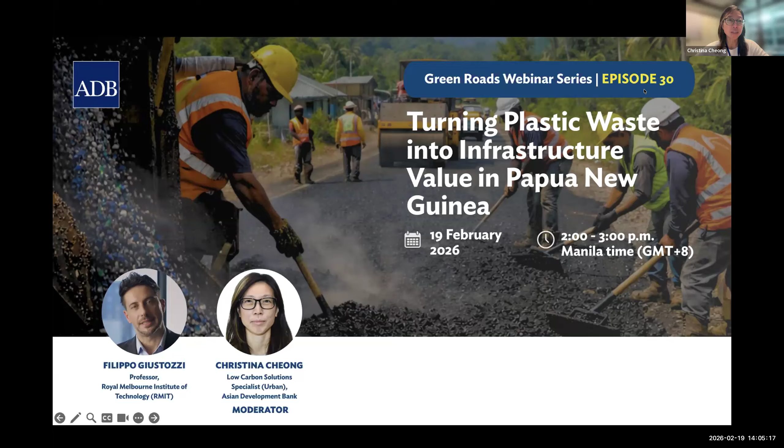Our speaker today is Professor Filippo Giustozzi from RMIT University in Melbourne, Australia. He is a pavement materials and design specialist with over 18 years of consultancy experience in Europe, the Middle East, Southeast Asia, and Australia. His consultancy portfolio covers the design and performance optimization of road pavements, environmental analysis, and development and implementation of polymer modified bitumen systems, recycling technologies for roads and construction waste, and the integration of sustainability into large-scale highway and airport projects. So very extensive experience across roads and pavements technologies.

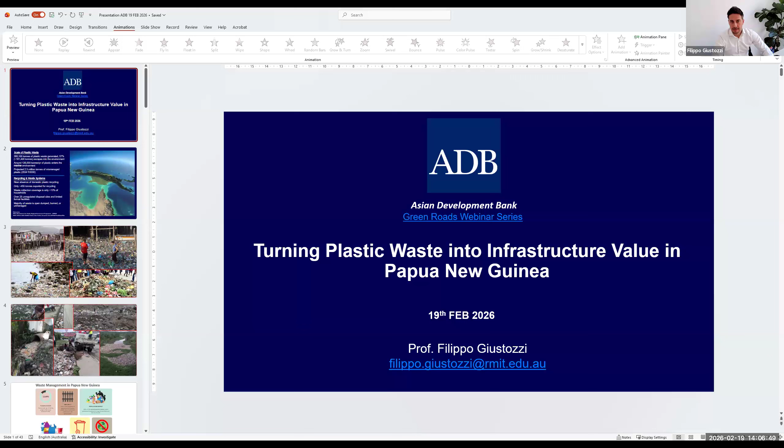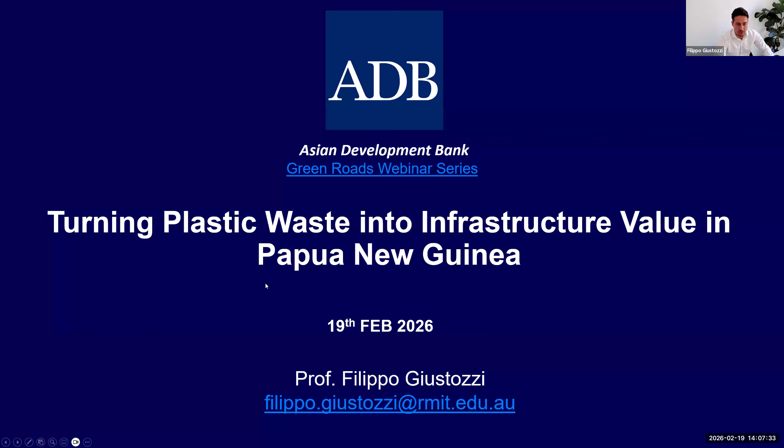Thanks and good afternoon, everyone. I would also like to thank Michael and Ian for this invitation. Today my talk is going to revolve around how to possibly manage one of the most famous waste streams these days, which is plastic, and how to use that meaningfully in converting this waste into a future recyclable value for infrastructure, especially looking at Papua New Guinea, with a little bit of context given by other applications around the planet, including Australia, where I'm from.

Before we start with the real presentation, I just wanted to put some introductory slides here showing you Papua New Guinea. Most of you might be aware of Papua New Guinea and where it's located, very close to the top tip of Australia, as you can see.

As with many countries, especially many developing countries, the plastic issue has become a larger and larger issue year by year. As of the latest statistics I was able to find, which was 2024 data, there are 285,000 tons of plastics generated annually in Papua New Guinea. Most importantly, 57% of it, which is quite a large amount, escapes into the environment. Some of this is reprocessed and sent overseas, but 57% still escapes into the environment. And particularly when it's out in the environment, about 126,000 tons every year are getting into the ocean, which is quite a large number.

There are studies projecting that this will increase significantly because the population of Papua New Guinea is increasing, and the waste is not taken into consideration and recycled properly. It's always dumped or burned or unmanaged. This has generated a projection of up to 2.3 million tons of mismanaged waste plastic by 2035.

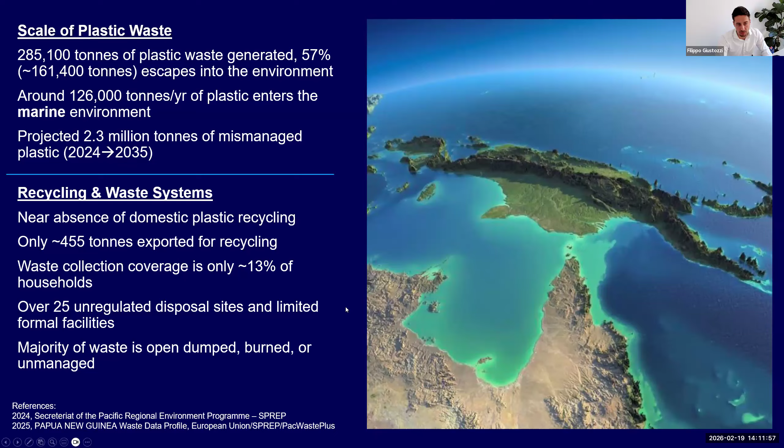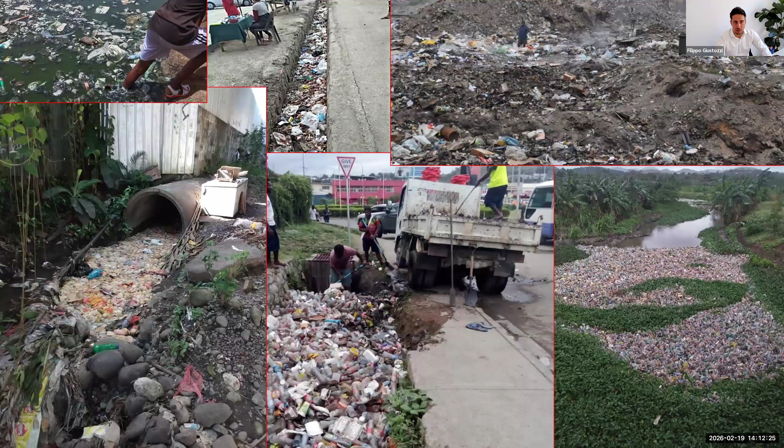This slide, and the one after, is similar, representing what the problem is or was at certain sites in Papua New Guinea. Some of these sites have been remediated now, so they don't look like they did when this photo was taken, but it gives you an idea about the general problem around waste, and also about waste plastic.

It's not just waste that contaminates the land, it's also waste that gets into the infrastructure, into the sewage, into the culverts, curbs and channels. Every time there's a rain event - and in Papua New Guinea you have the wet season, which lasts several months - the importance of the sewage system, curbs and channels becomes very significant. The fact that they're all clogged with waste and plastic is a waste of resources, because men need to go on the ground and unclog the infrastructure, but it's also contamination of the land itself.

So as a summary for waste management in Papua New Guinea: plastic waste accounts for about 13% of the total waste generated in that country. Considering about 10 million people living there, that means about 134 kilos per person per year is generated in terms of waste. There's a projection of population growth of 3.1%, so the waste generated is also going to be higher, projected to surge by one third.

But most importantly, what we've seen is that facilities to recycle are almost non-existent. Recycling, if there is any, is primarily done by private companies at a very small scale today. But the situation is improving, and I'll show that to you in a second. The waste management system also isn't facilitating these recycling efforts, because most of the waste goes to landfill and there's no separation of waste - glass goes together with plastic, together with timber and construction demolition material.

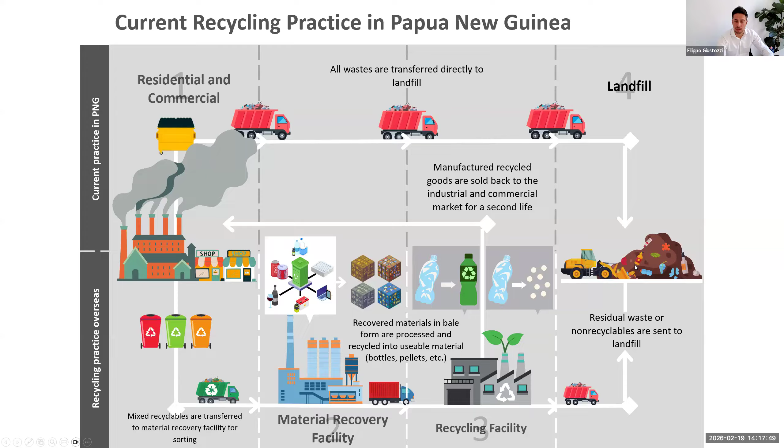So as you can see, there is a linear trajectory moving from the waste down to landfill, meaning the recycling effort is zero. That's more of an indication of a linear economy, and this is what is happening in Papua New Guinea.

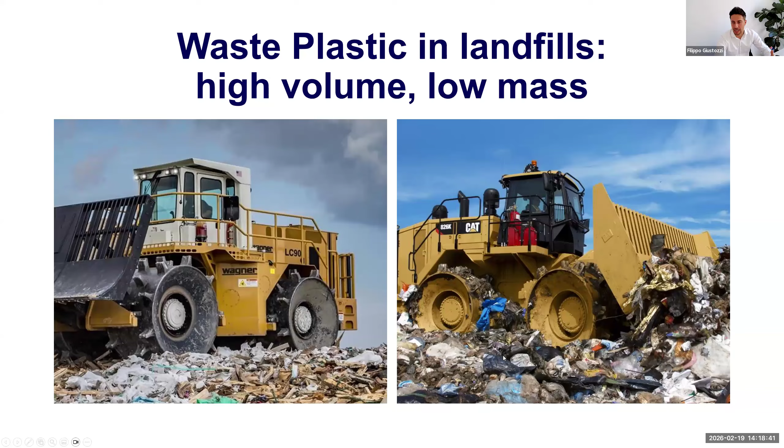And this is problematic in a landfill site because space is valuable and it's not unlimited. Some of the main landfill sites in Papua New Guinea are already full, and they are thinking about expanding them to make sure they have enough to put new waste coming in every day. That's probably one of the reasons why some of the waste is getting burned directly on site in the open air at the landfill.

So the waste management in Papua New Guinea can be improved, but what I would like to convey are these four insights. Number one is that a lot of plastic leaks into the environment. The waste is not captured, and it can be captured for reusing. Infrastructure might be one of the avenues, and it cannot be the only avenue, but it's one of them.

There is significant opportunity to divert plastic into construction materials, as I will show you in the next few slides, instead of putting it into the oceans. The infrastructure sector is emerging as a key end user because of the large volume of material being used when building infrastructure, roads, bridges, curbs and channels, footpaths, airports, aprons and railway.

You will see a few examples later. Number 4 is there is a growing waste of volume, meaning the potential supply of recyclable material is not limited. There is as much as we want if we are able to exploit it.

On the positive side of the story, there is this missing link today between the waste and the infrastructure that can recycle the waste, but also the final transport infrastructure that can use the recycled waste.

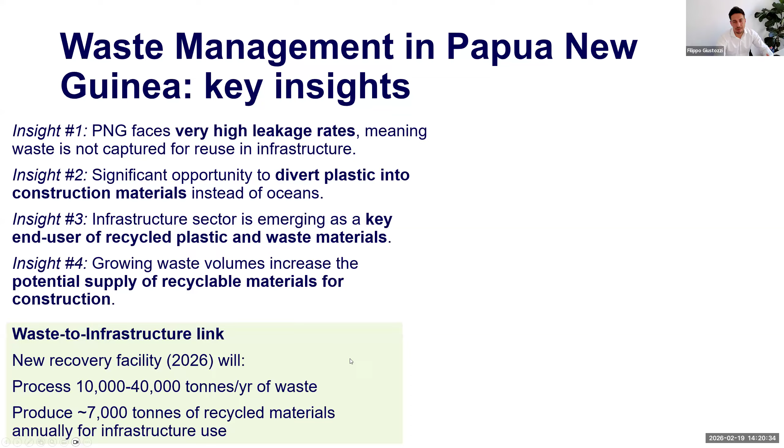Now that's the figures for the waste and waste management systems in Papua New Guinea and Port Moresby. Let's have a look now at the infrastructure, because that, at the end of the day, is where we are thinking about using the recycled plastic. Keep in mind, I'm not calling it waste plastic because we can't use waste plastic in infrastructure. We need to go through a recycling process first, and I will show you what the differences are.

So the road network in Papua New Guinea is not extensive. It's around 10,000 kilometers of primary national road network. In Australia, we have about 800,000, so it's a different scale, but it's expanding.

Probably only 1/3, and this was when this report was published last year, so maybe by now the situation can be a bit worse because roads there are deteriorating faster. 1/3 of the roads are in good condition. Most of the national roads are unpaved, meaning there is no asphalt on top, and only about 2,600 kilometers are sealed type of roads.

Now there is a new big infrastructure development project called the Connect PNG program. This program aims to develop and build 16,000 kilometers of roads over 20 years. In addition, there is an upgrade for 9,000 kilometers of subnational roads. So what is now 10,000 kilometers can easily double or triple over the next 20 years, meaning a lot of volume of construction material needed to deliver this program.

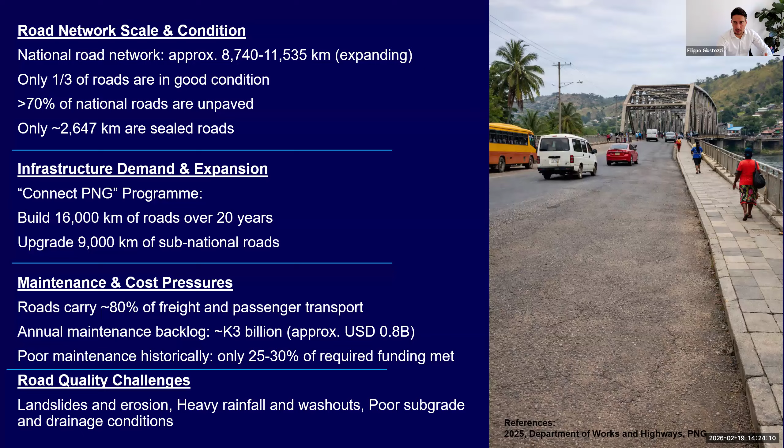Now the road quality challenges in Papua New Guinea specifically revolve around landslides, erosions. There is heavy rainfall there, as I talked about the wet season, washouts. It's not uncommon, and I've been there a few times already, to go there after a rain event and find big puddles all around the main roads, roundabouts being washed away completely within a few months. It's quite an impressive situation of what water can do when there is a slope and the quality of the subgrade as well as the road infrastructure is not the way it should be.

They are also developing a lot of footpath and urban infrastructure in several cities, Port Moresby, Lae, and other cities. There is rapid urbanization. They need to create more footpath, more pedestrian infrastructure, more drainage system, more pavement.

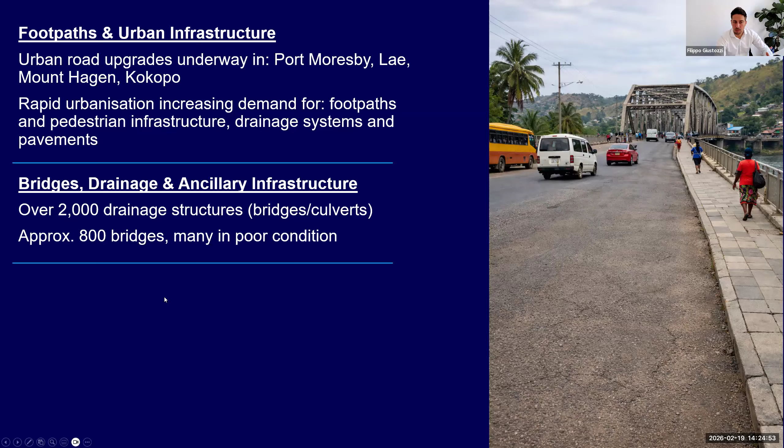All of that can be taken into consideration, because at the end of the day, we can't just put all the recycled plastic into roads. There are just not enough roads to cope with all of that. We can, though, expand into other territories like footpaths, urban infrastructure, road furniture, and I will show you a few things later, as well as bridges, obviously, with many of them being in poor condition.

Now, to close and give you a summary of the transport infrastructure, we looked at the waste before. This is a summary for the transport infrastructure. I summarized here three insights.

One is that infrastructure expansion obviously creates a lot of demand. There is a need for construction materials, and volumes are quite big. Kilometers and kilometers of roads require cubic meters and cubic meters of aggregates, of bitumen, of soil. So the role of infrastructure is quite massive in the development of a country, but it also requires significant resources. So there is an opportunity there to use recycled materials and absorb part of the recycled material.

Number two is that PNG cannot just keep building new roads and doing maintenance on roads every six months, every wet season, every year after the wet season. They need to build something that is longer lasting and reduces maintenance at the same time, because this will save budget over the life cycle of the infrastructure, obviously.

Number three is that it's not just roads, as I said, with plastic modified asphalt, but you can develop other things out of recycled plastics: geosynthetic for slope stabilization and erosion control, plastic pavers, plastic tiles for footpaths. You can develop drainage components like pipes, street furniture, benches, noise barriers, lighting poles, and so on and so forth. I will show you a few of these later.

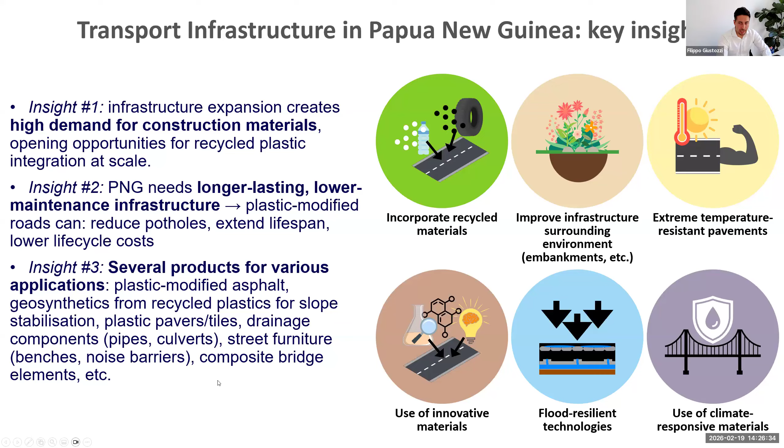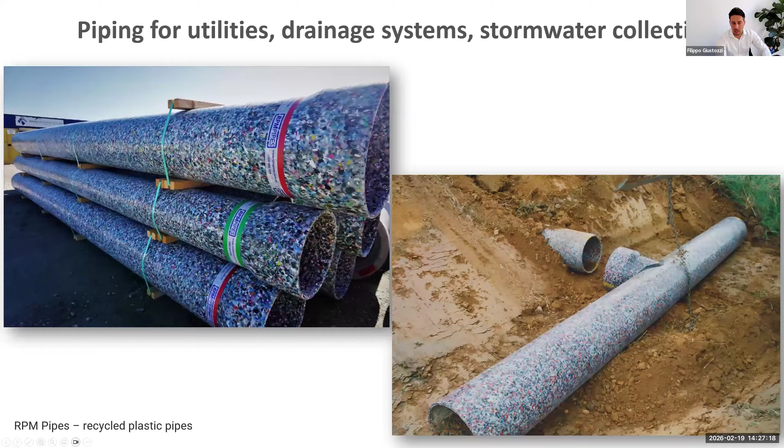So this is a summary of many applications and product development that have involved recycled plastic over the past, I would say, five years across Australia. This is an example of piping for utilities, drainage systems, stormwater collection. You can use it for sewage and roads, and also for agricultural purposes. I put here the name of the company producing it, so if you want more information, you're welcome to go to the website. It's all made out of recycled plastic, as you can see from the multicolored aspect of the piping.

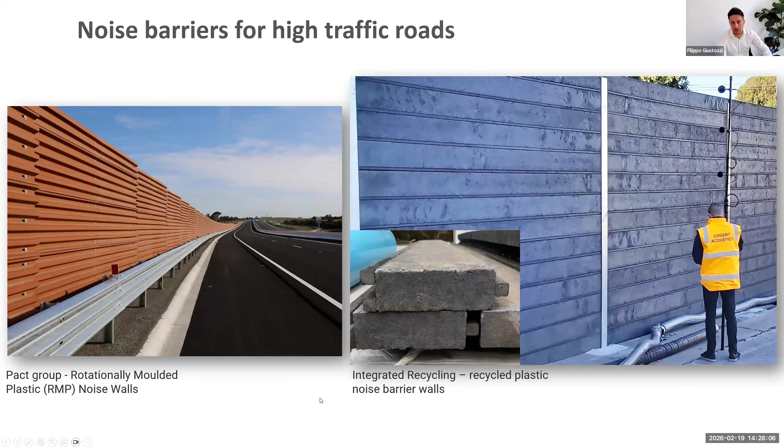Noise barriers for high traffic roads. Two types of noise barriers here were developed and tested. There are probably more around the world by now, but it's something that can be done, and it has already been applied in the field. This is how it looks - the slat made out of the horizontal slats that you see here, a zoom in of that, made entirely out of recycled plastic. The man there is measuring the absorption or reflectance of the noise signal, given a source of noise on the other side of the wall. So this has been installed and it's ready - shelf ready. You can go and buy it if you need it.

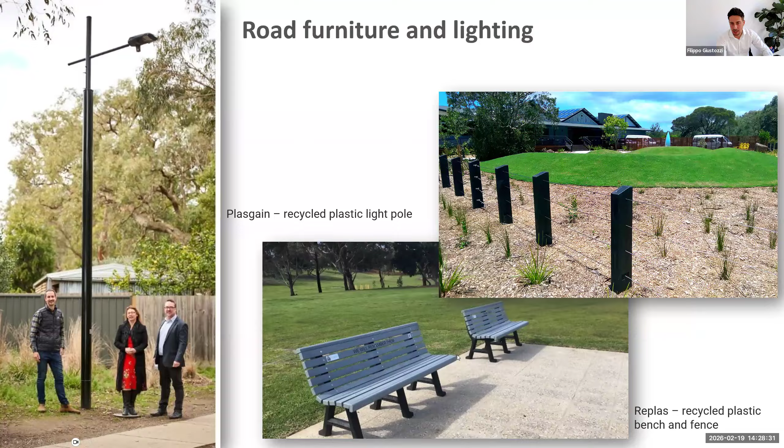Road furniture and lighting - this light pole is all made with recycled plastic, the side pole that can produce lights on the street. Plasgain produced it. We have plastic benches - pretty much every supermarket in Australia has got these plastic benches. Fences for housing are also all made with recycled plastic.

Recently, one of the main train stations in Melbourne installed recycled plastic railway sleepers. You can see the concrete sleeper on the left-hand side of the top picture, and then all the plastic sleepers being placed by the man at work on the site. And also recycled plastic blocks if you need to build something lightweight - that was a good option at the time.

So it's not just plastic, recycled plastic in roads, but you can engineer waste plastic into a way that makes sense once the product is recycled. That can generate more avenues for companies, increase the business, but also foster a more sustainable infrastructure in a way.

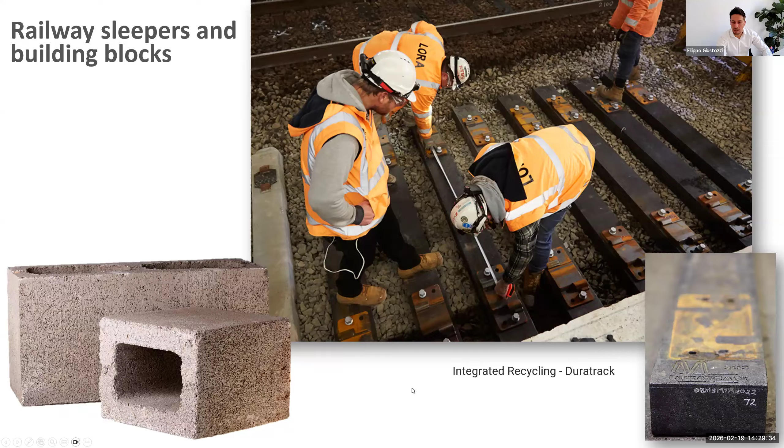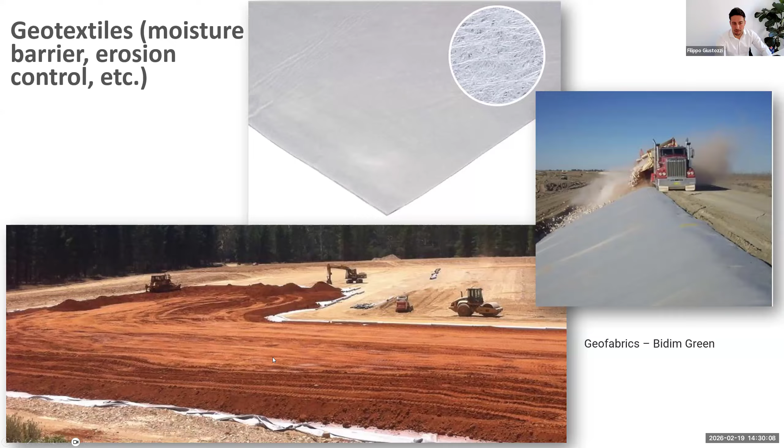Oh, geotextile, I was forgetting about this - moisture barrier, erosion control, especially in a country where there is a lot of rain and a lot of water coming up from the bottom all the way to the surface where the road is, having a geotextile that acts as a moisture barrier. This is all made out of recycled plastic. It's called Bidim Green, but there are several companies selling similar things for erosion control on slopes and embankments, all the way to substrates for roads, avoiding capillary rise of water.

All of this just to show you two different pictures. On one hand, we've got the massive material demand from the Connect PNG program, the expanding cities, and the increasing population that requires more infrastructure. And at the same time, we've got a lot of waste that goes into the ocean, that is not recyclable, that is not recycled - we don't know what to do with it. Most of the time it's just mishandled, put into landfills, and burned eventually. So if we could connect the two things together, that would be a very good example of something useful for the country.

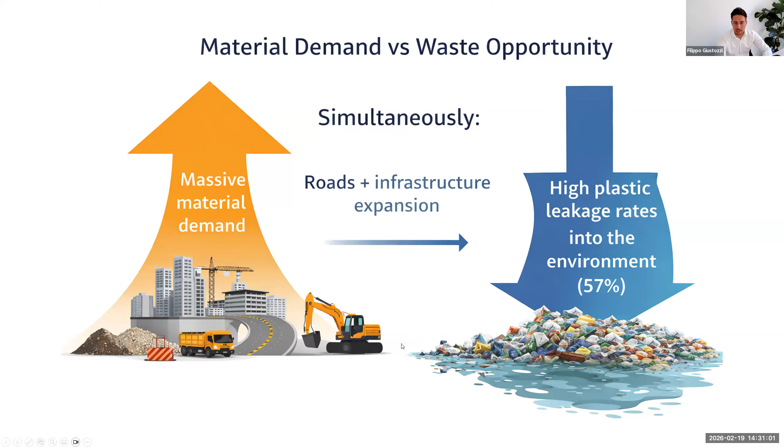This isn't just a problem for Papua New Guinea, but a very common issue across Pacific Island nations and developing countries generally. I want to be clear, though, that PNG is actually a very nice country.

So coming to the road environment, how does plastic in asphalt really work? I get a lot of questions about whether the road will look multicolored, similar to the pipes you've seen.

The answer is no. We can't just use any type of plastic, the same way you can't use any plastic to build a bench or a geotextile, because plastic properties vary so much - from very rigid plastic that melts at 260 degrees to very soft plastic that melts at 110 degrees.

Some, not all, of these plastics are suitable for modifying asphalt - the black material you see on the road. When you add this particular type of plastic into the road mix, made of stones, aggregate, and bitumen, the mixing is done at high temperature, around 160, 170, 180 degrees Celsius.

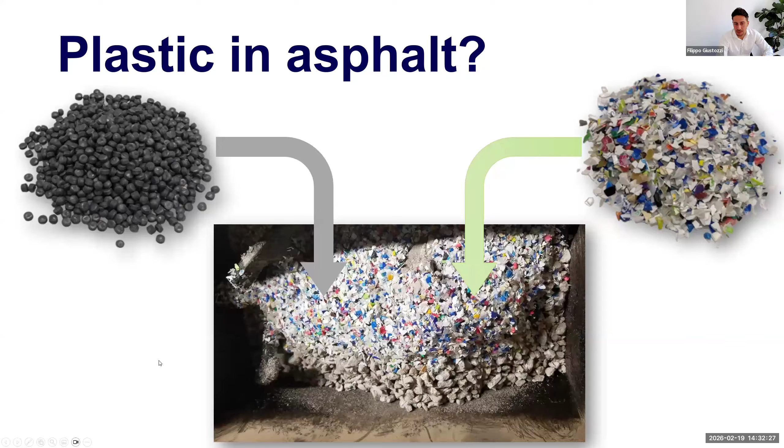So if you use plastic like the ones we've used in Australia, which melts at around 110 to 150 degrees, it will all be gone by the end of the process. I'll show you an example of this from our laboratory.

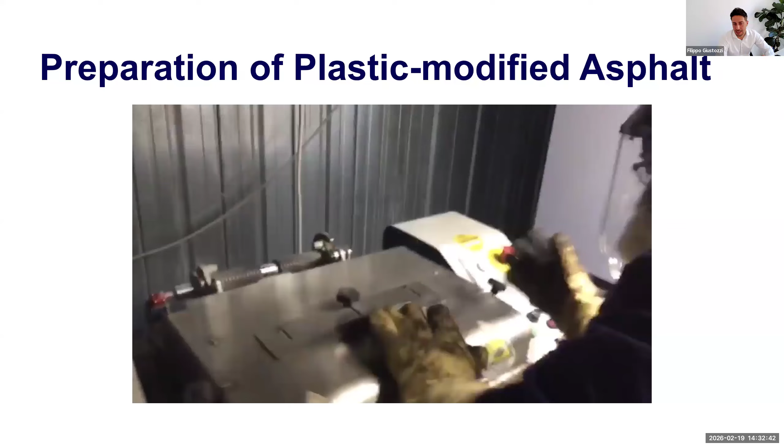This is the multicolored plastic together with the aggregates, all done at high temperature. After mixing, there's nothing left of the colors - it's all incorporated together into the same mix.

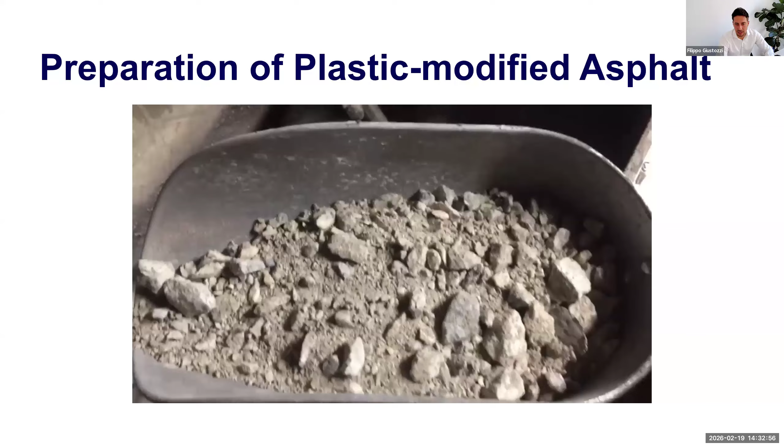This already answers a lot of questions around microplastics generation. The plastic doesn't exist anymore in its previous form - it becomes part of the mix itself. And the quantity is very minimal, about 0.5%, 0.6%, 0.7% of the total material.

But because infrastructure requires so much material, even 0.5% amounts to 7.58 tons of plastic per kilometer of road. I'll show you some statistics later.

I was only able to show you the laboratory mixing process, because you can't put a camera into a large asphalt plant and film it, or stop the plant mid-process to take video - it would be unsafe. So we've done this demonstration in the lab instead.

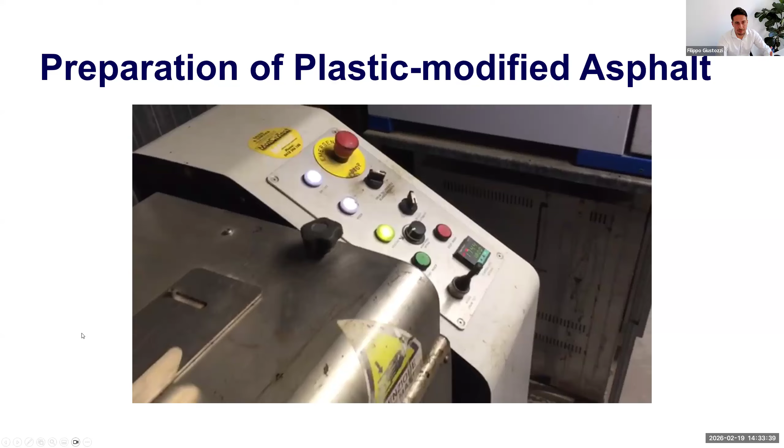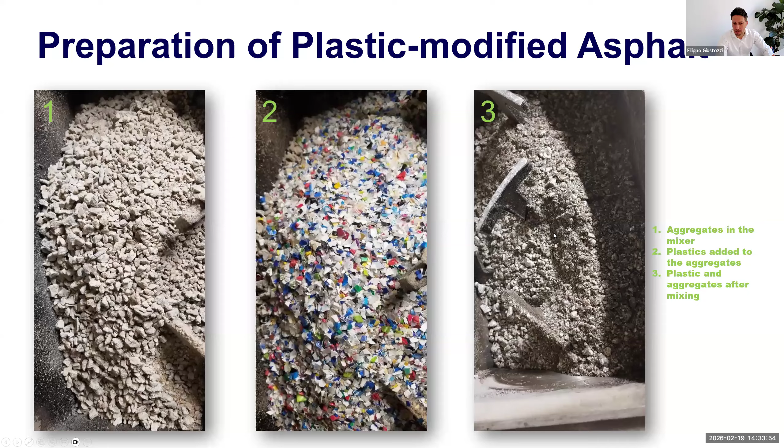A few photos: step one is the aggregates being loaded hot into the mixer. Step two is addition of the plastic. Step three is the end of the process when everything has been mixed together, so each aggregate is coated with recycled plastic that's no longer multicolor. It's melted, creating a sticky effect around the aggregates before bitumen is added, converting everything into that black asphalt substance.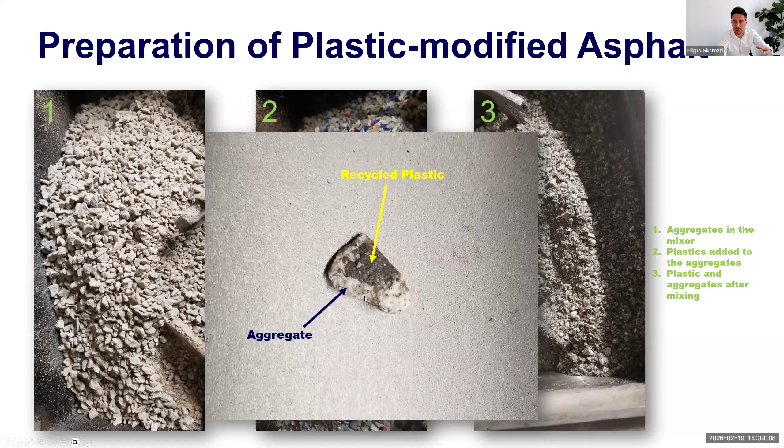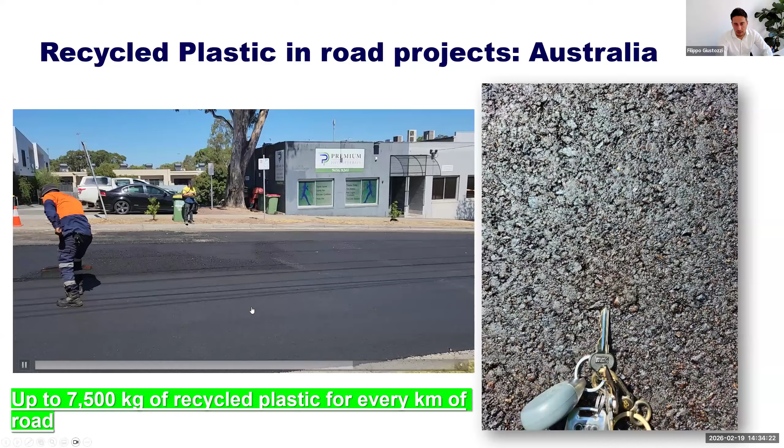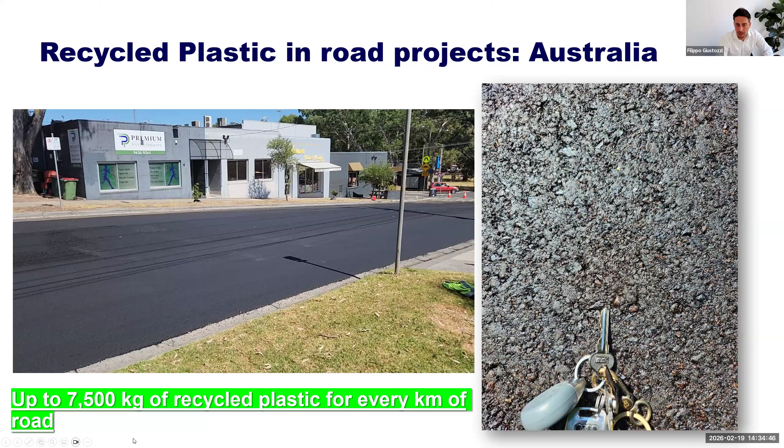This is an example of an asphalt road paved with recycled plastic in Australia. Many recycled plastic roads have been laid in the past - I think the first was probably in 2018, so about 8 years ago now. As you can see, it looks black as usual, nothing changes. You can use up to 7.5 tons, or 7,500 kilos, of recycled plastic per kilometer of road, though it's usually around 4,000 to 5,000 kilograms per kilometer.

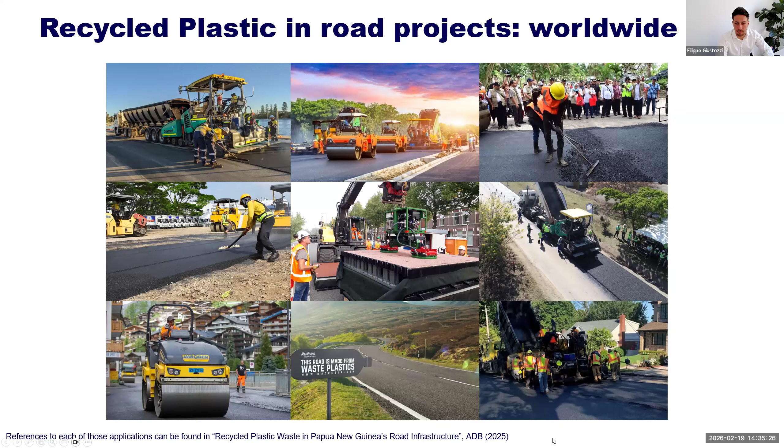Other examples show this isn't just done in Australia - these are from all over the world, including Canada, the United States, England, and different parts of Europe. If you want the full, comprehensive list of each location where these photos were taken, check the reference at the bottom, which I've also included at the end of the presentation.

Now, I didn't think of this as a technical presentation, so when preparing the slides I avoided difficult-to-grasp graphs, equations, and lab or field results. But it's well known now, especially since the use of recycled plastic in roads isn't something that happened yesterday.

We've been discussing this for quite a while, and we've been using it on quite a number of roads that have been monitored over the years. Plastic in asphalt, if done correctly, and by correctly I mean using selected recycled plastic, and I underline selected because you can't use everything you want, improves resistance to high temperature.

Think about this in a PNG environment, in a PNG context where the temperature is actually quite high. There's an enhancement in terms of resistance to cracking, and cracking is the beginning of what a pothole can become later on down the road. It increases asphalt stiffness, reduces fuming and emission at high temperature, does not cause additional harm in terms of microplastic problems, and does not affect the future recyclability of the road materials.

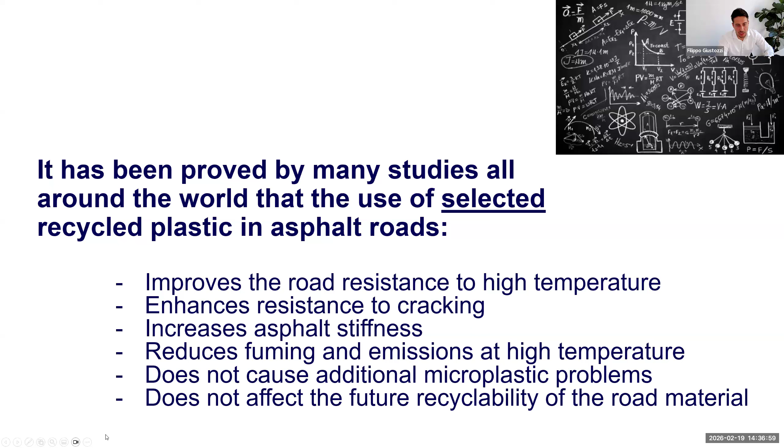If you're unsure about or want more information about any of these bullet points, just drop me a line or do your research online. There's a lot of material that has already been put out there since quite a while now.

In Australia, for instance, I was one of the people who developed specifications for the use of recycled plastic in asphalt. This was done between 2020 and 2022, 2023. These are national specifications, and you can see the suitability of recycled plastic as road construction materials. If you want to download it, you can do so for free through the Austroads website.

Austroads is the assembly of all the departments of transport in Australia and New Zealand. The release of microplastic from plastic-modified bitumen mixes, the asphalt abrasion test, that's something we developed, a world first, to find out if there was indeed a need to look at microplastic coming from recycled plastic-modified asphalt. There are also guidelines in the state of Victoria for using recycled plastic in asphalt mix.

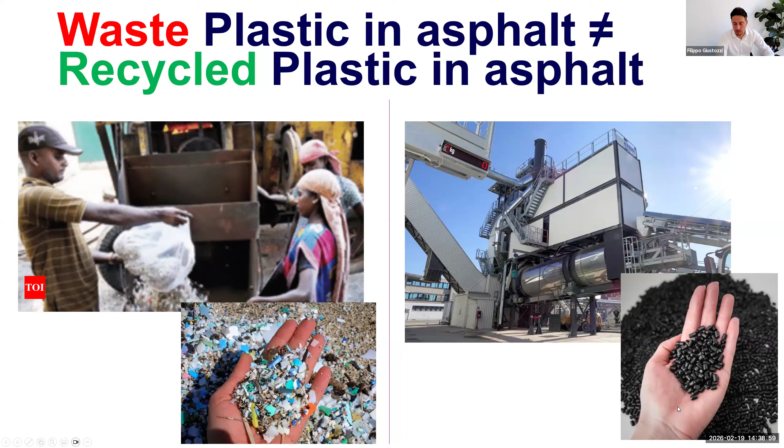To get to that point of the small little black pellets, you need to go through a recycling phase. The recycling phase starts from the collection of plastic in different bins, different colors. The plastic is then sorted. Don't get me wrong, in some countries plastic sorting is done manually by several people who do that all day, separating different types of plastics. And the recycling is still effective.

Obviously, it might not achieve the same hourly production rate as a more developed country using infrared sorting or other artificial intelligence technologies associated with infrared and other things, but it might still be a starting point. After sorting, the plastic is washed, then shredded or ground, then melted at high temperature, extruded into small filaments, and then put into cold water for quenching and pelletization.

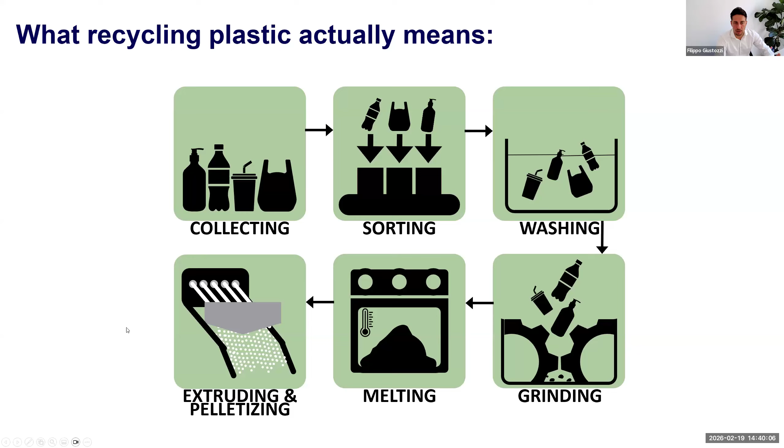I'll show you how it looks. From the original plastic waste that is baled at the material recovery facility, it gets into the plastic recycling center where it's separated. So you get all the bottles going to one side, and the plastic lid of the bottles going to a different side, because the lid is sometimes polypropylene while the plastic bottle is polyethylene terephthalate, PET. So it's all separated.

Then it becomes a matter of shredding it into small particles. After shredding, it gets washed. Sometimes the washing is done before shredding, but as long as we wash it, it's fine. Then there's an extrusion process, it gets into cold water, and gets cut into these small little pellets, and that's the final product.

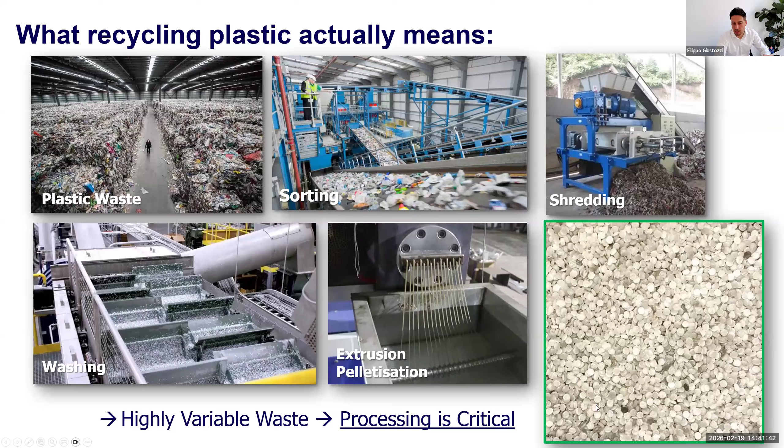This is a recycled product, so there might be contamination because the sorting, the shredding, the cleaning cannot be 100% accurate. But it can be produced with certain tolerances or tolerance values that are suitable for road construction.

Going to the road project in Port Moresby and how we use that to implement some climate mitigation strategies. That's related to the fact that the temperature in Port Moresby is rising, and it's rising differently coast versus inner part. But overall, they've got pretty much the same issues as all the Pacific Island countries.

Segregation, we went through these 4 different stages in Port Moresby: segregation, processing, supply to industry, and construction. And keep in mind that there is nothing there, so we had to develop everything from scratch, just from literally meetings, phone calls, visits to the plants, and trying to find out what they have, how much they have of this, what the capabilities are, who the main player could be, and put the group together into something that is finally making sense.

So as you can see, for the segregation, as I said before, if you don't have automatic machines doing it for you, you need to do it by hand. This is an example of what is happening and what it has been happening for the past few weeks in the Baruni landfill in Port Moresby.

This is directly from the landfill where the plastic is sorted and divided into different types. We gave them a flyer, some explanation of what we wanted and what we didn't want, and they started separating it into different streams. Waiting at the end of the day, taking notes with little notebooks about how much of each type of plastic was collected. You see they separated the high density polyethylene from the polypropylene, and they didn't find much polypropylene on that day because it was only 6.54 kilos. As you can see, the date is the 20th of October 2025.

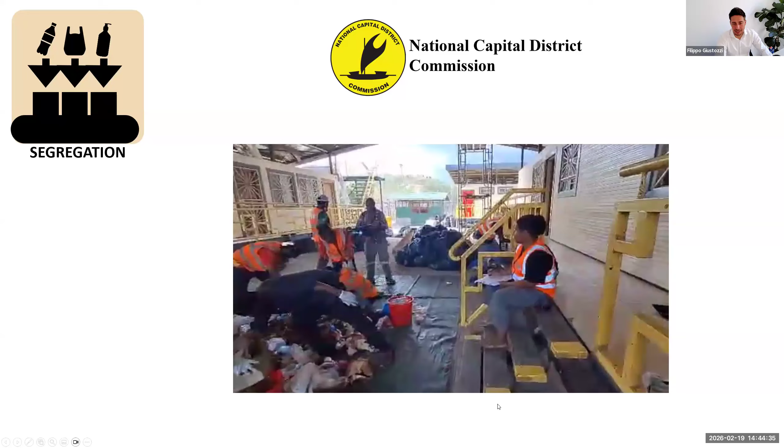It's basically separating recycled waste plastic by hand, just making sure that only what we require for road purposes is collected. You can see that they've done quite a lot, and it's all separated into different stockpiles.

Okay, the second step is the processing. And for processing, there was nothing in Papua New Guinea, so we had to liaise with a company called Total Waste Management Group in Papua New Guinea. They had bought this machine.

It's one of the first of its kind in Papua New Guinea, and this is basically a shredder. It can take big chunks of plastic and shred it into this minuscule kind of granulate pellet type of form that we can then use further down the track to build roads.

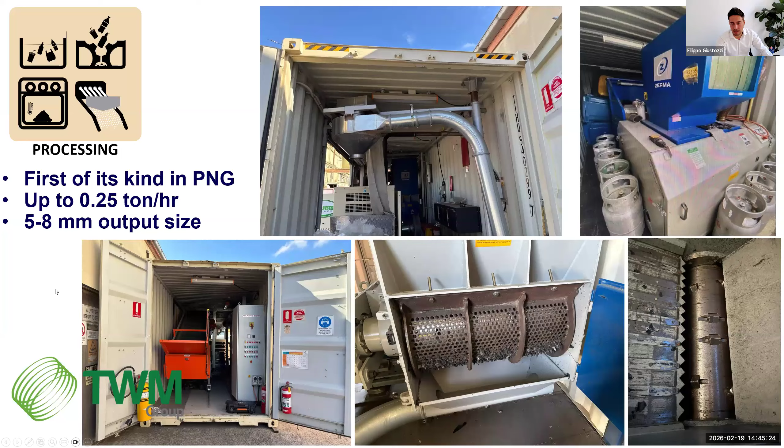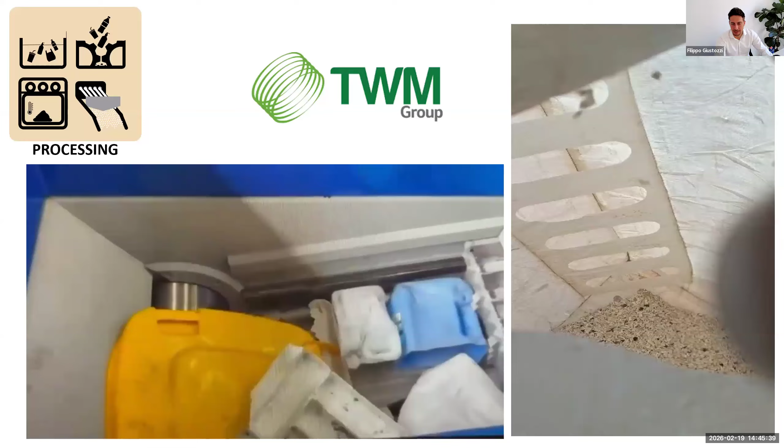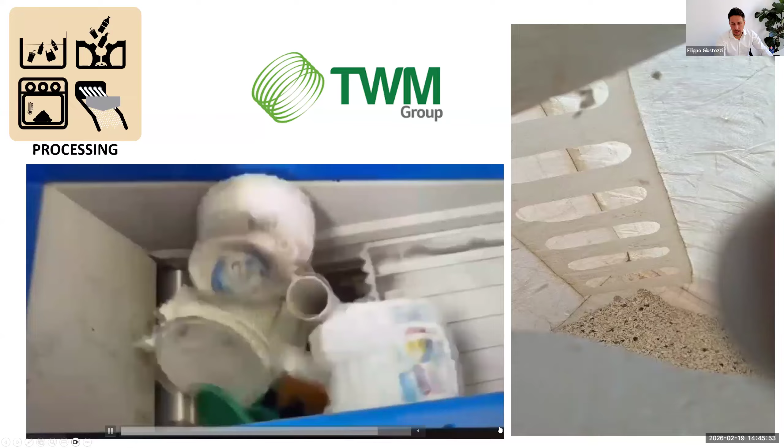So this is how the machine actually works. They usually put in their different types of plastic, that's the wheelie bin lids and different containers, water containers, shampoo bottles, other types of plastic containers, piping, and different types of plastic material. What comes out of it is this little powderish granulate on the right-hand side, approximately 5 to 8 millimeters in size.

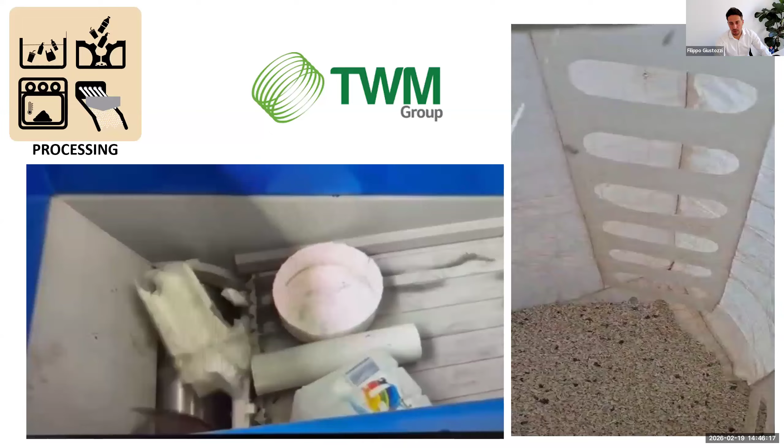So we went above and beyond connecting these people with the recycler manufacturer that were producing the machine. The private sector bought the machine and imported it into Papua New Guinea from Australia. So there was quite a lot of background work to make this happen.

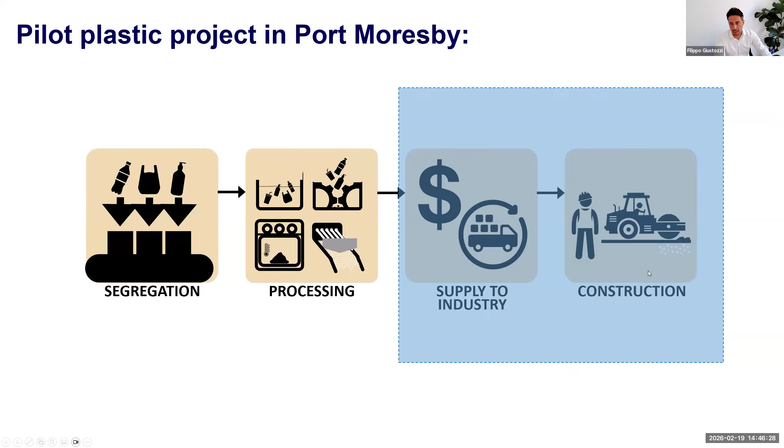And where we're at now is we are supplying this product to the industry, and finally we will build the roads, hopefully this year. So the idea is to take 2 roads and divide them into different sections.

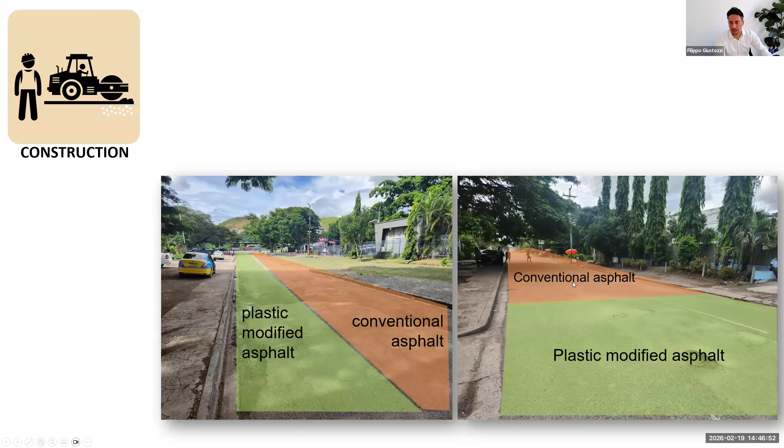In this case, on the left-hand side, you can see 2 lanes, one left, one right: one plastic modified asphalt, the other conventional asphalt. The other road on the right-hand side has got 2 different sections, one plastic modified, the other one conventional.

The idea was to put together the NCDC people, which are the main people working in the Port Moresby municipality, especially the waste and sustainability team, together with the engineering team, and make them talk to each other, which is sometimes not an easy task. Then get together the industry that can do the cleaning, the reprocessing, and the conversion of what they have collected into a suitable form.

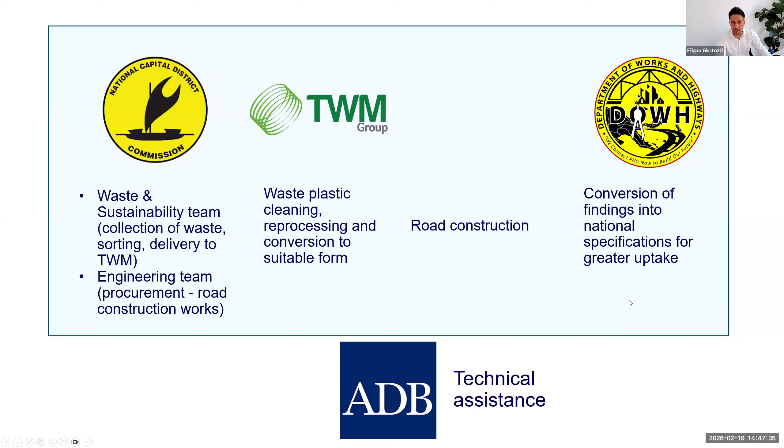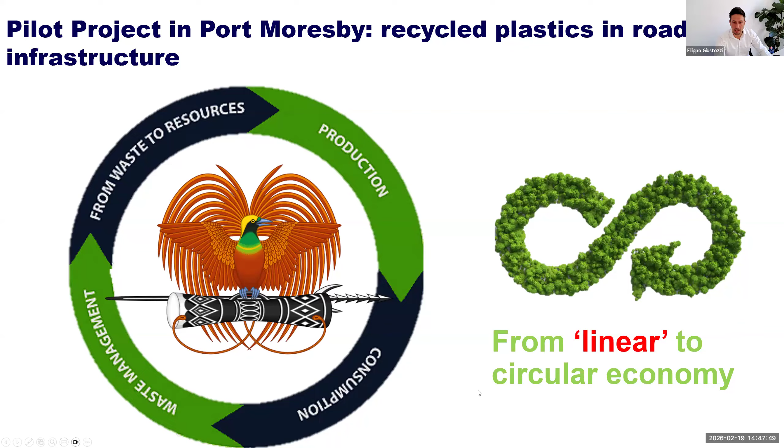Then the department, the NCDC, will appoint through a tender process the contractor, and everything will be converted into national specification, hopefully down the track, as other countries, including Australia, have already done. So this is to transform Port Moresby and Papua New Guinea from a linear system, like the track going into landfill, to something that resembles more of a circular economy. If you want more information about phase 1 of the project that has already been completed, you can find all the information here, I put a link so you can have a look. It has been compiled by Hussain and myself.

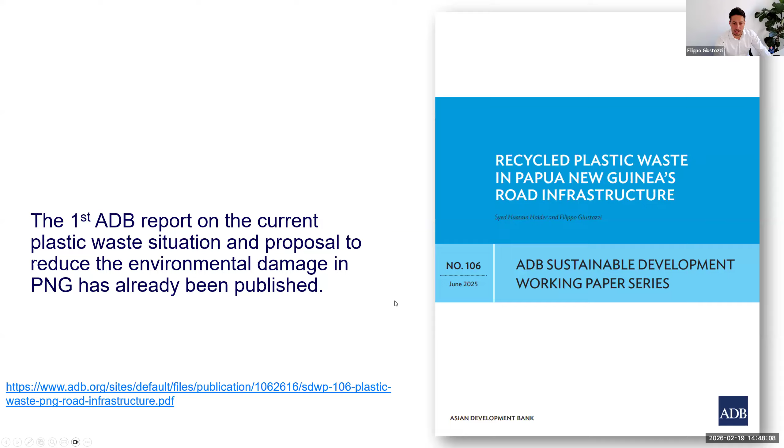Phase 2 is the one that is currently ongoing and hopefully about to be finished.

All of these can be used in infrastructure, as we have been doing for many years. Once we have waste transformed into products, there is a need for policies and specifications, because without specifications we won't be able to use it at the end of the day. But the fact that we have included the main decision makers from the beginning will probably facilitate the conversion into national specifications down the track.